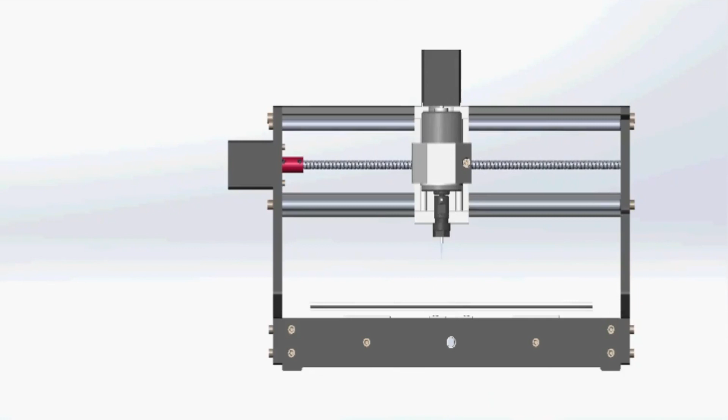If you've got a lot of spare parts lying around, you may be able to cobble together your own laser engraver without too much trouble. We've already seen small engraver builds that use an Arduino, but Jeremy tipped us off to Xiang Zhai's version, which provides an in-depth guide to building one with a Raspberry Pi.

Xiang began by opening up 2 spare DVD-RW drives, salvaging not only their laser diodes, but the stepper motors and their accompanying hardware, as well as a handful of small magnets near each diode.

To assemble the laser, he sourced an inexpensive laser diode module from eBay and used a vise to push the diode into the head of the housing.

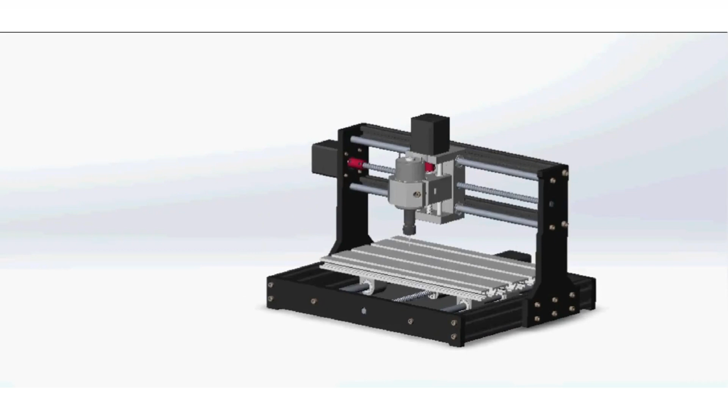With the laser snugly in place and the appropriate connecting wires soldered on, Xiang whipped up a laser driver circuit, which the Raspi will later control.

Xiang worked out the stepper motor's configuration by following Groover's engraver build, which we featured a few years back, attaching the plate that holds the material to be engraved onto one axis and the laser assembly to the other.

Check out Xiang's project blog for details explaining the H-bridge circuits, as well as the Python code for the Raspi.

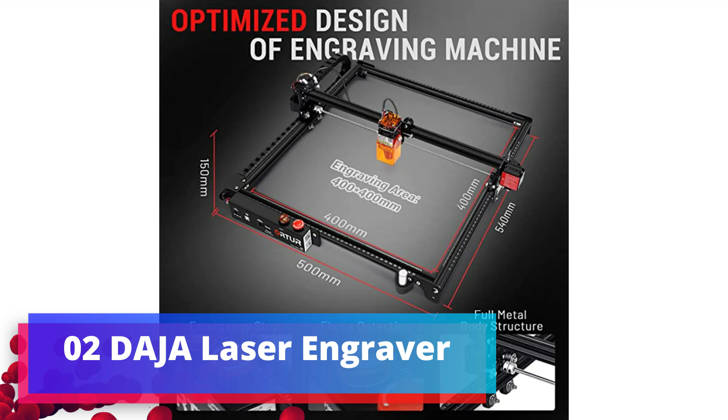As always, if you're attempting any build involving a laser, please use all necessary precautions.

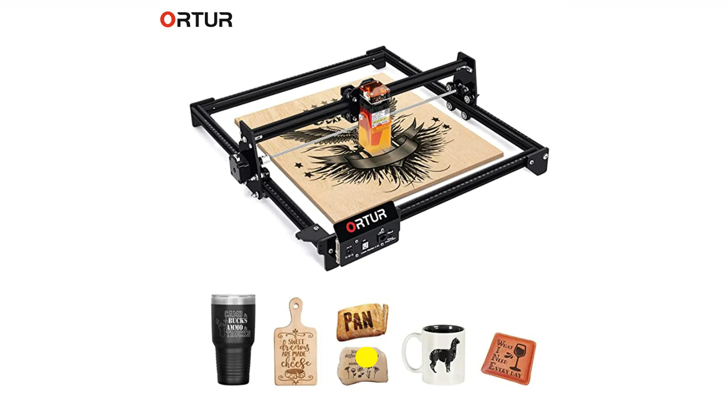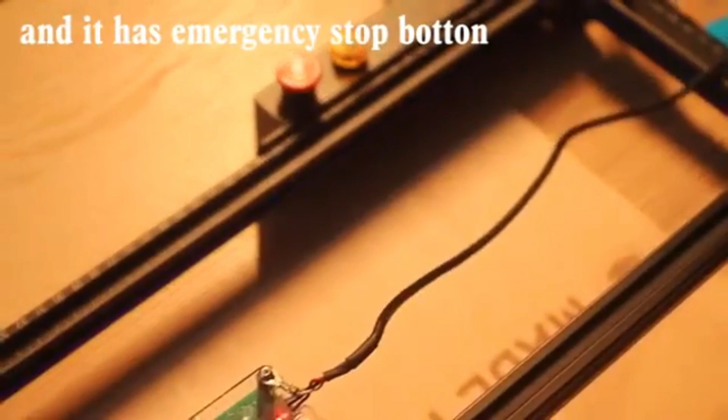And if you need more information on using DVD burners for their diodes, check out this hack from earlier in the summer. Got a couple of old DVD-RW drives lying around collecting dust? Of course you do. If not, you likely know where to find a pair, so you can build this totally adorable and fully dangerous laser engraver for your desk.

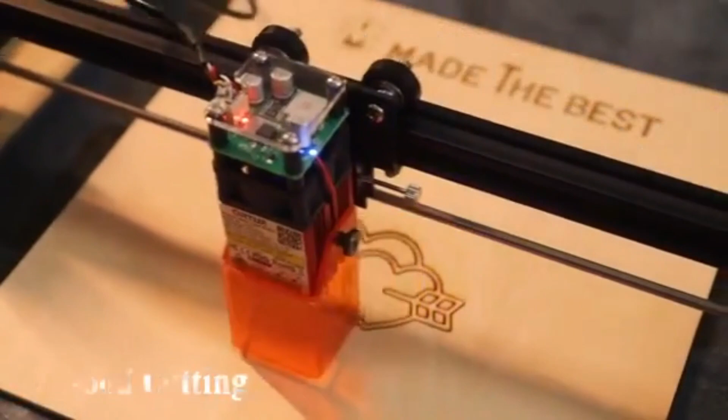Smartronix doesn't just tell you to salvage the stepper motors out of the drives. They show you how it's done, and even take the time to explain in writing what stepper motors are and why you would want to use them in this project, which is a remix of Maggie Shaw's design over on Thingiverse.

As you might expect, the 2 steppers are wired up to an Arduino Uno through a CNC shield, with a pair of A4988 motor drivers. These form the 2 axes of movement. The 250 mW laser is attached to X, and the platform moves back and forth on the Y-axis.

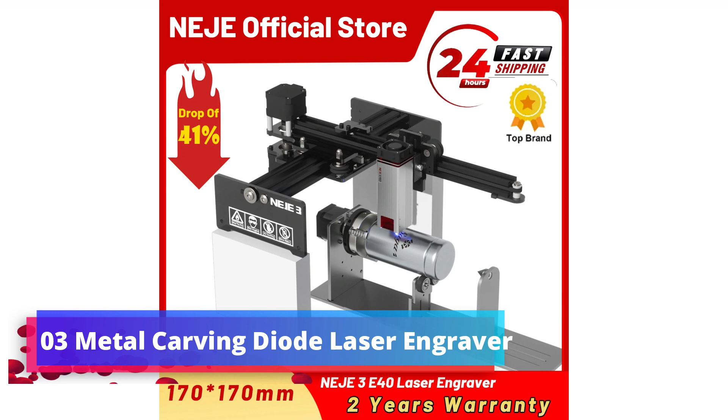We'd love to have one of these to mess around with. Nothing that fits on that platform would be safe. Just don't forget the proper laser blocking safety glasses.

Need something much bigger that won't take up a lot of space? Roll up your sleeves and build a SCARA arm to hold your laser.

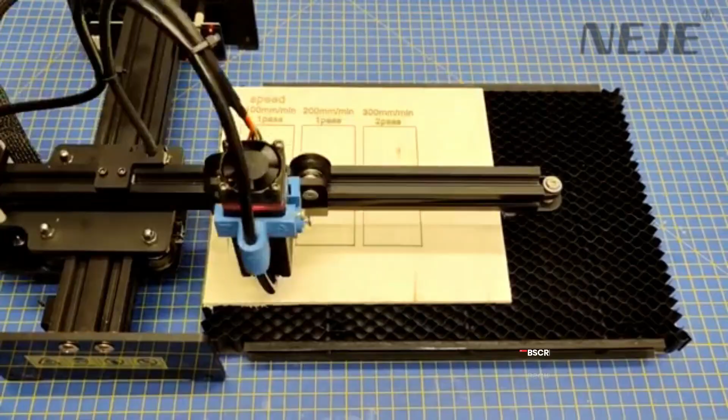While xTool has a history of creating elegant laser machines that can be used in the home, such as the award-winning xTool M1, if you need more power in a safe, less messy form than offered by open-frame diode machines, then you'd be lacking. I love the new xTool P2, for example, but it's large and heavy and maybe too powerful for home crafting. The new xTool S1 sits between the brand's 2 newest laser cutters, offering more power than the M1, but smaller and cleaner to use than the P2.

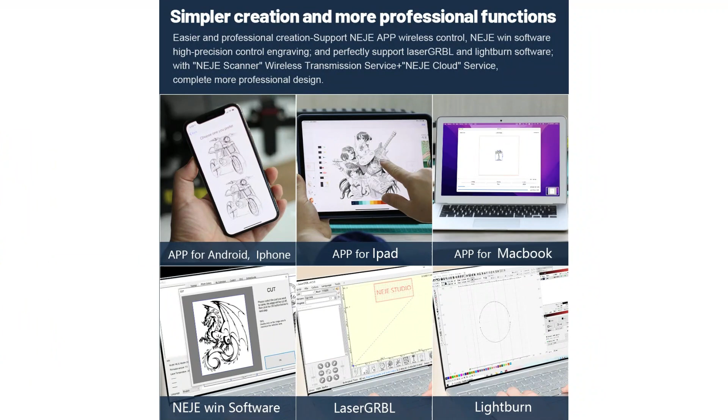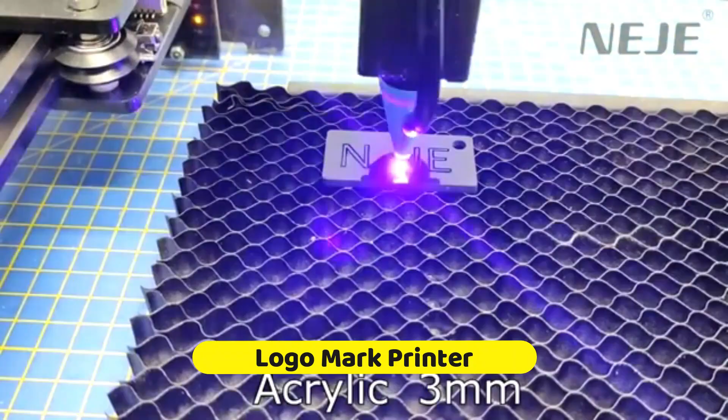With an enclosed 40W diode laser setup, the xTool S1 is a state-of-the-art high-wattage semiconductor laser engraver and cutter that is small enough to fit into a crafter's room and powerful enough to manage projects.

For example, the xTool S1 is compact and lightweight at 20 kg, less than half the weight of the xTool P2 at 45 kg. Laser power is 40W.

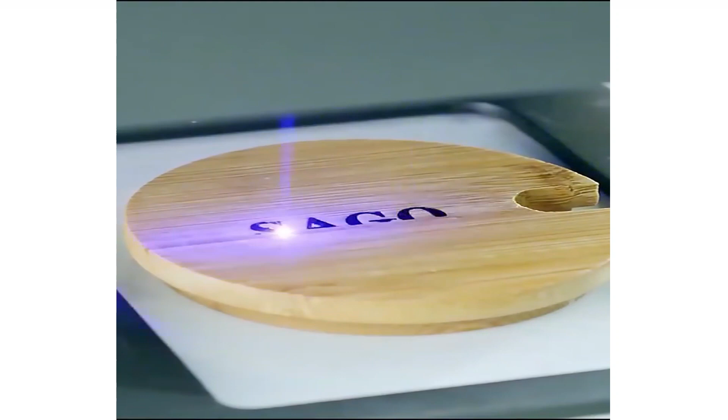Spot size 0.08 x 0.10 mm. Working speed 600 mm. Working area 498 x 319 mm, or with automatic conveyor feeder 470 mm x 3000 mm, though an additional transmission rail is required.

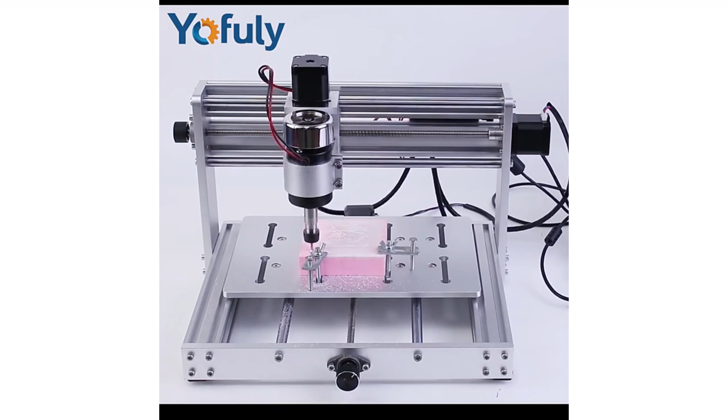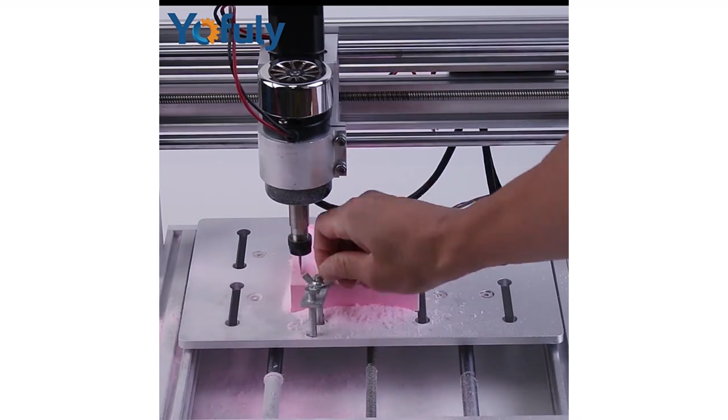This means the xTool S1 can support the kind of curved surface engraving found in the larger xTool P2 machine.

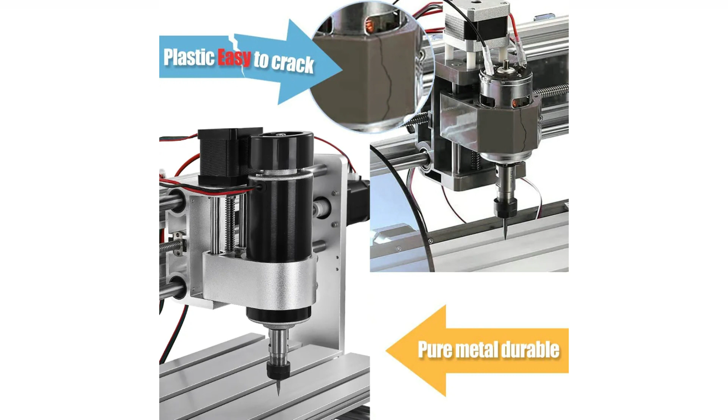The cutter's laser module uses 8 5.5W lasers compressed to deliver a 40W beam, which can offer a comparable cutting efficiency to a CO2 machine, and can cut 0.04 mm stainless metal.